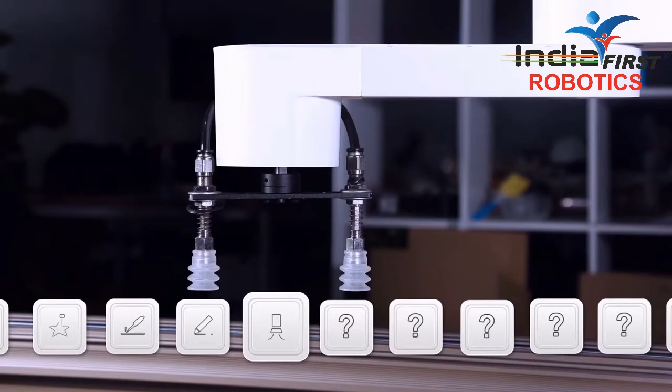DoBot M1 is an industrial-level robotic arm production platform. It's precise, fast, extendable, and also affordable. It can be your 3D printer, laser engraver, soldering machine, or whatever else you build upon it. Yes, you can build one.

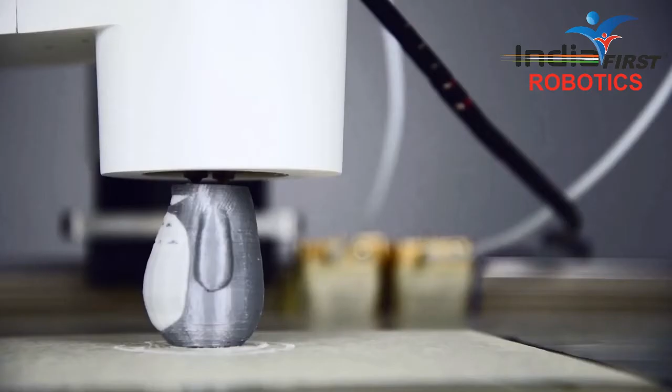DoBot M1 has 0.02 millimeters repeatability and 1.5 kilogram payload. With these standardized, easy-to-change heads, you can easily turn this power into productivity.

Like 3D printing, it can print your product with fluency and details. Two colors? No problem. Or use laser to engrave your unfading masterpiece. Or do sophisticated soldering, customizing your PCB circuit board better than a pro.

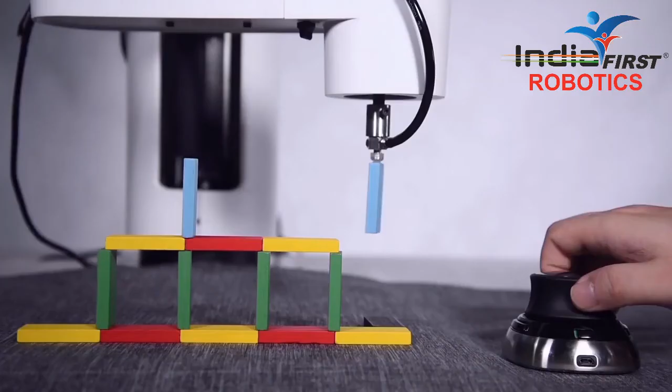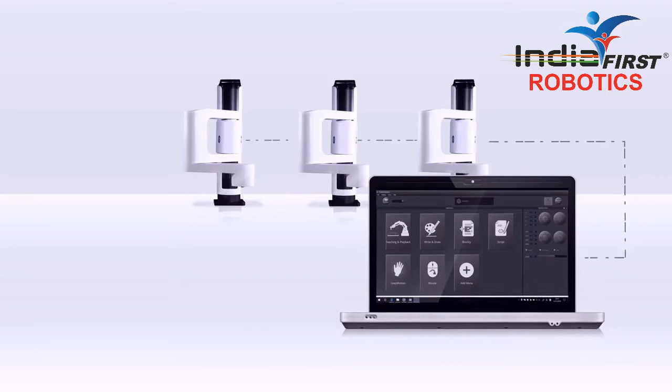Besides being multifunctional, DoBot M1 is also easy to master and develop. DoBot M1 supports Wi-Fi and Bluetooth connection. You can connect to multiple arms at once and control them via our app on PC or smartphone.

With a force-sensitive 3D mouse, you can control DoBot M1 as precisely as you want. No more trying and guessing on confusing software. With its handhold teaching feature, you can input coordinates in the fastest and most intuitive way.

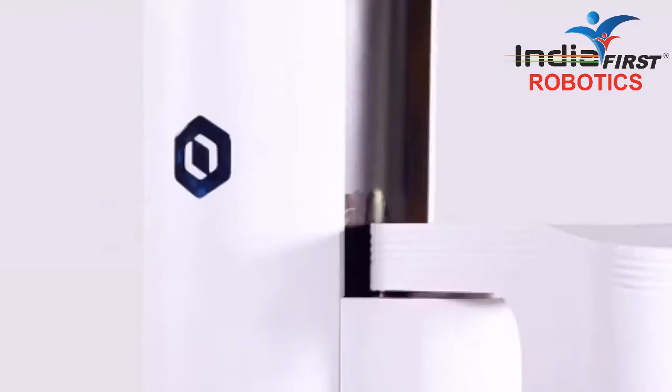DoBot M1 is programmable via the integrated APIs. You can use official or self-built developing environments, or use this visualized programming interface, making things a lot easier.

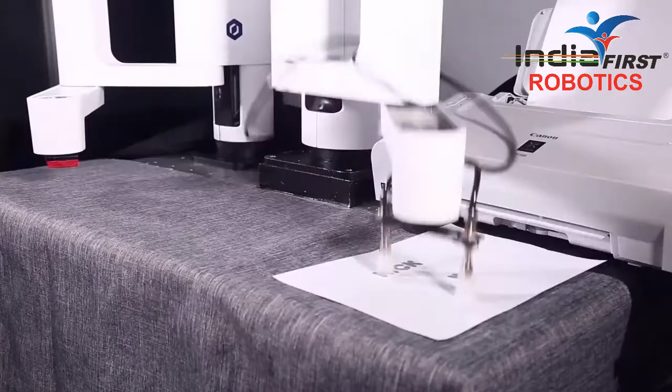But we don't stop here. DoBot M1 is highly extendable. There are no limits to your imagination on it. The maximum reach of DoBot M1 is 400 millimeters, which is enough for most situations. But why don't we think bigger, when it can actually go further?

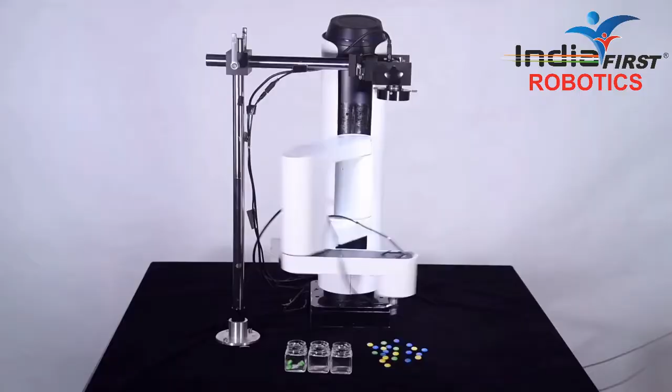Or use a camera for visual recognition. With its fast and accurate image recognizing algorithm, it can distinguish colors without making one mistake.

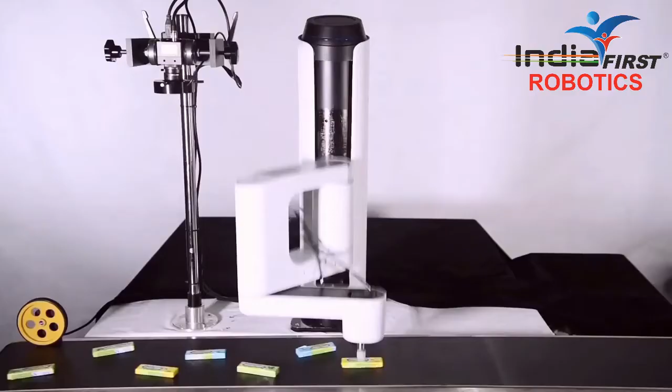DoBot M1 loves companions. They can work seamlessly together, processing paperwork way faster than humans could. Ultimately, DoBot M1 is built to replace manpower in production lines, working day and night non-stop. The built-in mapping and path planning system provides excellent mobility, offering inventory management service in your warehouse.

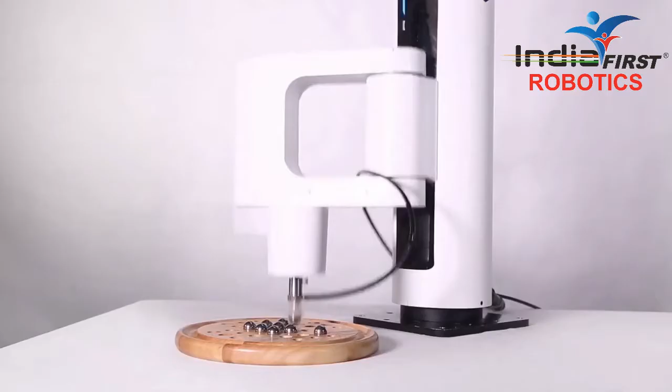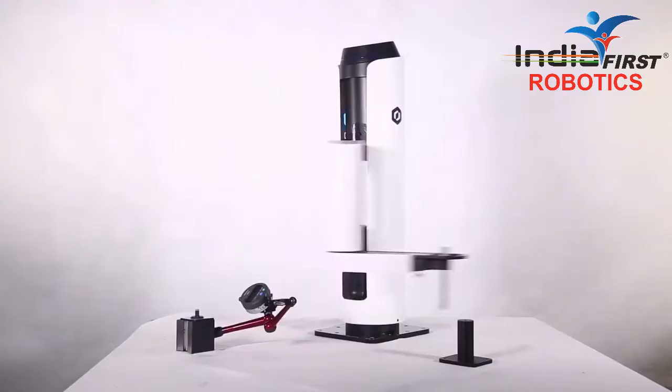To be able to create so much value, DoBot M1 has been built with extraordinary performance. The perfect calibration of the high-performance DC servo motor, harmonic reducer, and kinematic algorithm has brought out the best of both strength and speed. Repeatability of 0.02 millimeters.

Maximum payload of up to 1.5 kilograms. Angular speed of up to 200 degrees per second. It's also a steady player, never slips up.

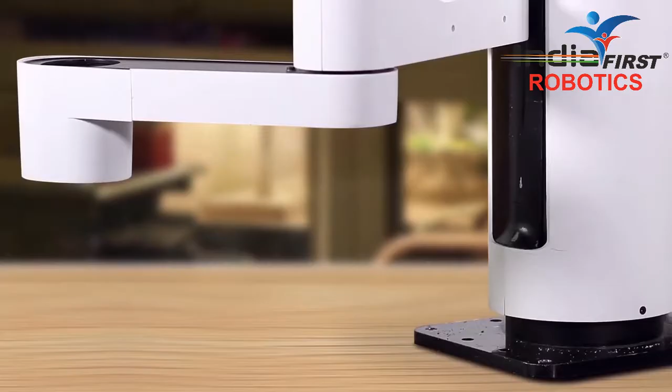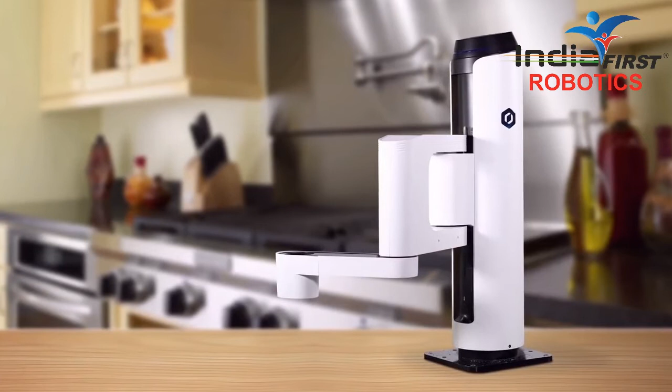Everyone loves creating things, and having a robotic arm is awesome. With DoBot M1, it's no longer a giant business's privilege to use professional robotic arms. Everyone can now benefit from cost-effective, user-friendly robotic arm technology. So when a new idea hits you, DoBot M1 will be ready. All you have to do is say yes.

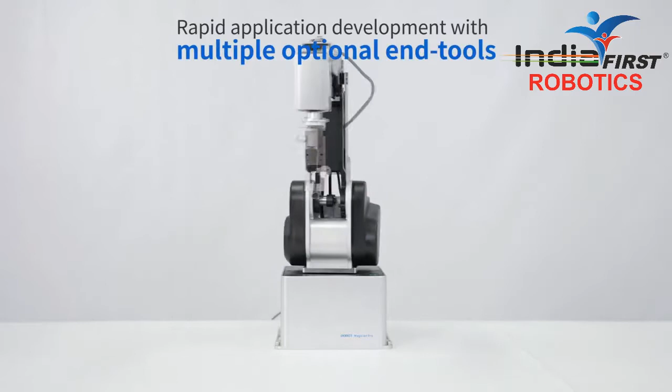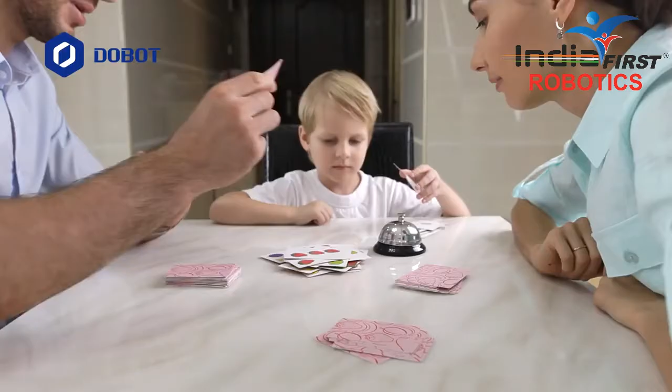Spending time with your loved ones is the best, but we also want to spend time on our hobbies. So how do we combine the two? Most hobbies require going to a specific facility or using specific equipment. But what if you could stay home with your family and do what you love? Now you can. Introducing DoBot Magician.

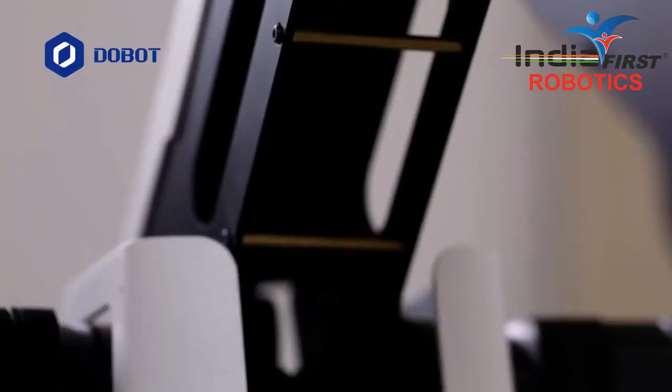The portability and multifunctionality has never been combined so well in a unibody design before. Powerfully potential in movements and enjoyable in silence. Discover a geek inside of you.

DoBot Magician can do splendid 3D printing. As a robotic arm, it's so precise that you can find plenty of details in the smoothly printed models. Get creative with the double color printing head and create original things like toys for your kids.

Say yes to the creative cook you've been hiding inside of you all this time. Shape your breakfast into whatever you like. Besides, you don't need to make a wire mess in the kitchen.

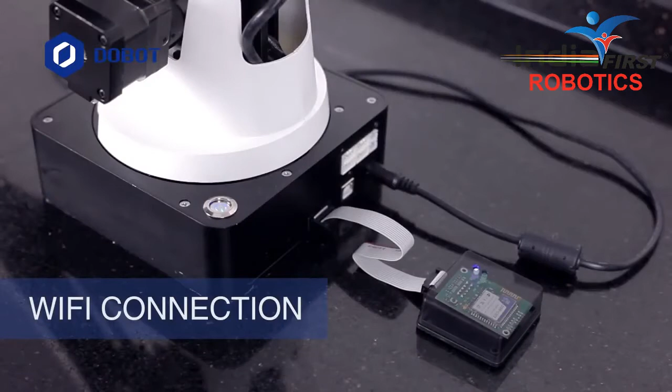Just use Wi-Fi. Unleash the possibilities with the handhold teaching feature. Teach DoBot to assist you in learning or to perform any other repetitive motion. Hold down the button and move the arm. Release, enjoy. Now the DoBot Magician software is integrated.

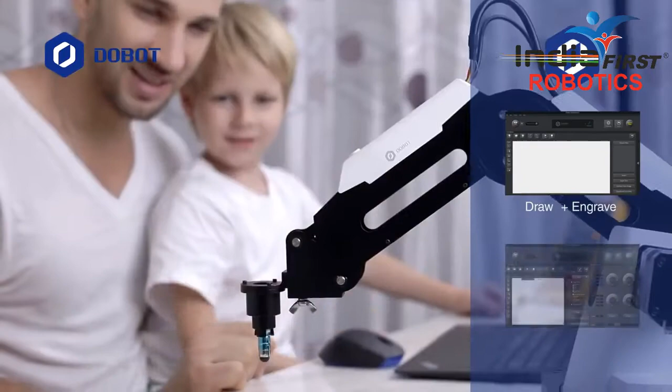DoBot Magician is your best robot to get creative with. Be twice as productive with multi-DoBot cooperation. Working without USB cables? No problem. Just pull it off and let it do its thing.

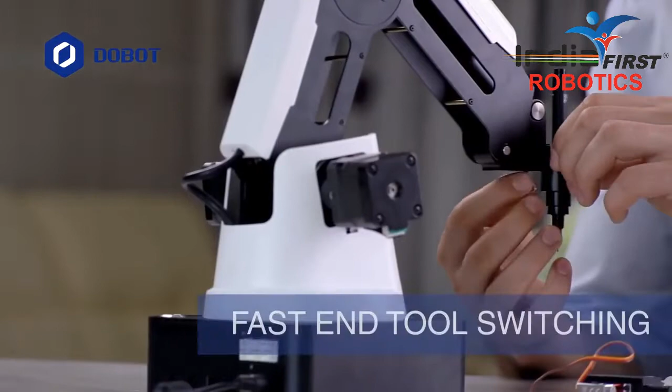Switching the end tool has never been this fast. Just unscrew the pin, change it, screw it back in. Done. DoBot Magician is also thoughtfully designed for advanced users.

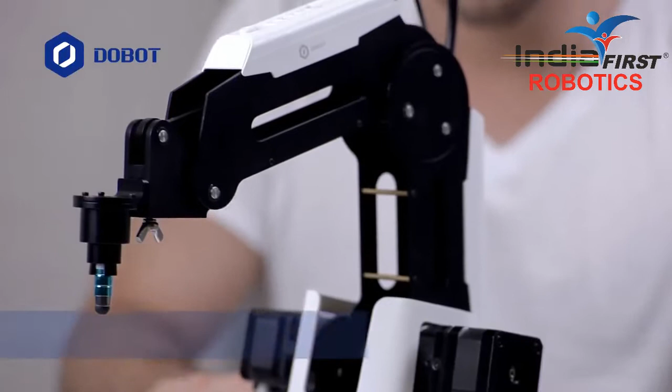There are 13 open connection ports. This is where you can really expand the horizons. You can connect additional modules like voice control, USB communication module, extra motor, or create one by yourself.

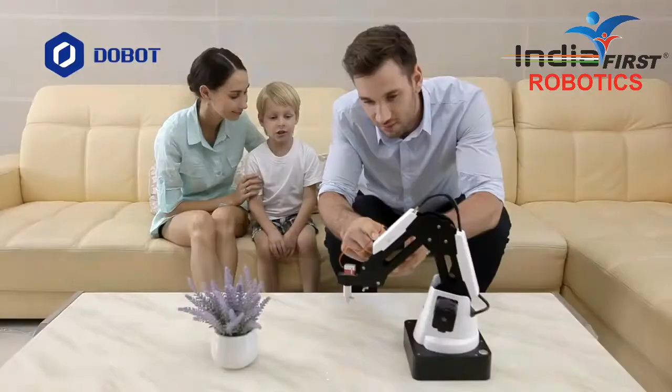You can also learn programming and robotics with DoBot Blockly. It's the best opportunity for beginners to get started in programming, no matter if you're a child or an adult. This is DoBot Magician, a robotic arm that integrates so many features to help you unleash your creativity, making you believe in what you've always wanted to. This is magic.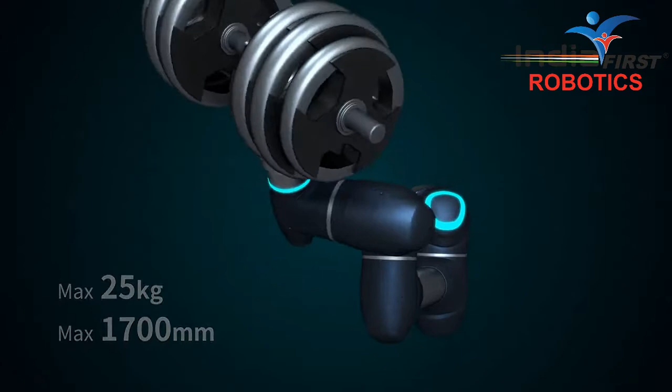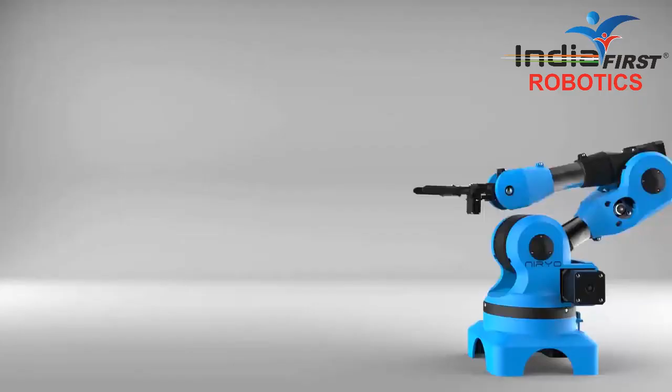Industrial robots are too expensive and hard to use. However, they could save you time at home, help you do creative work, or learn new technologies. So why keep these benefits away from you? Meet Niryo One, the first accessible 6-axis robotic arm.

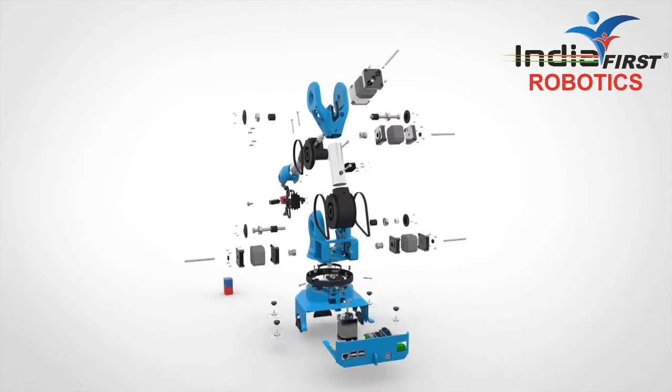Niryo One is a low-cost and user-friendly robot made out of 3D printing and open-source technologies. It was created so everyone can use it. For makers, Niryo One can help you learn robotics and be your perfect coworker.

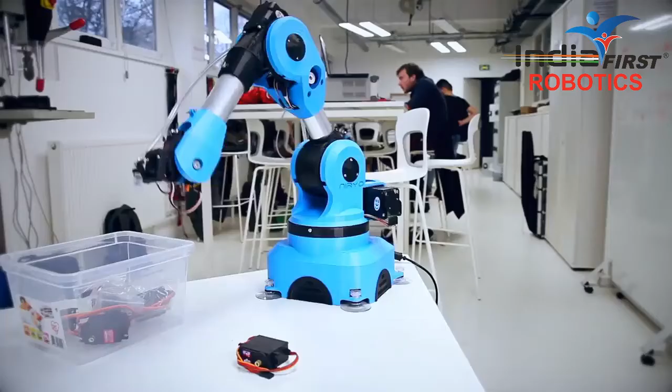It can easily pick and place many kinds of objects, for example, to automate a 3D printer. Do anything your imagination can create just by easily changing the end effector tool. With Niryo One, reproduce industrial use cases such as drilling or drawing on any surface with any orientation.

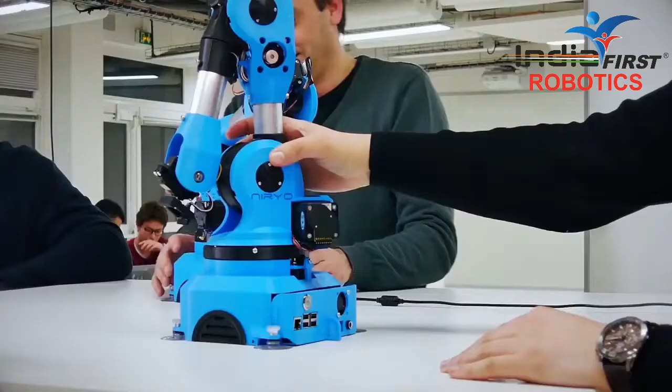Niryo One is great for robotics education, for students to learn, but also for children. They can get to know more about new technologies and get some programming basics. So much fun involved.

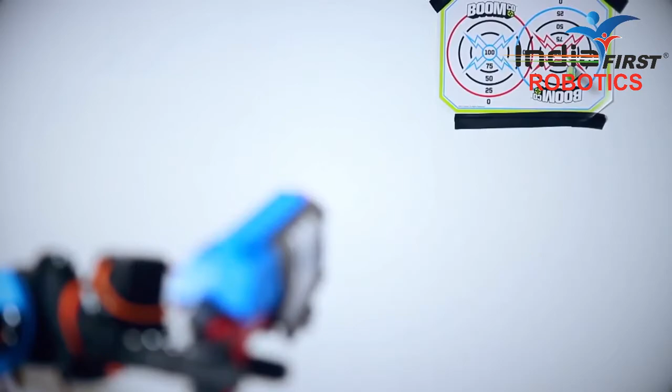Niryo One will also save you some time in daily life so you can relax and do the things that matter the most.

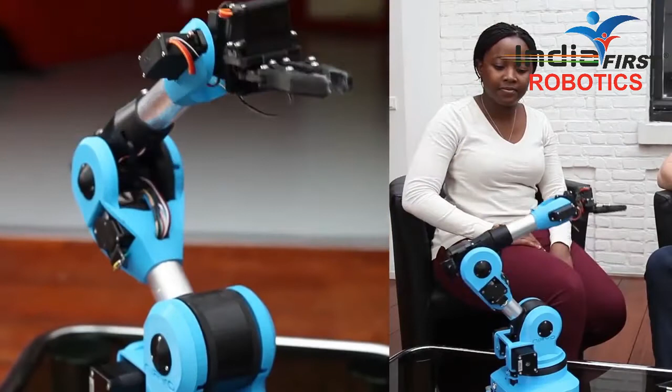Controlling Niryo One is so easy. You can teach the robot what you want it to do just by moving it with your hands. Want to use a gamepad? Here you go. You can use the mobile and web applications to have more control over the robot and control it from a remote place.

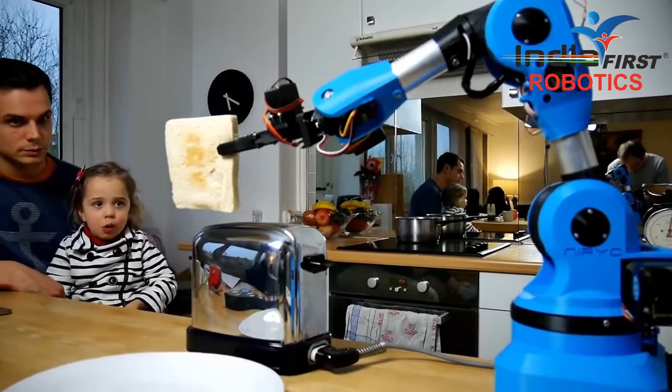Niryo One will be connected to the internet, which means you can also get free software upgrades, and you can share programs with your family, friends, and other people around the world.

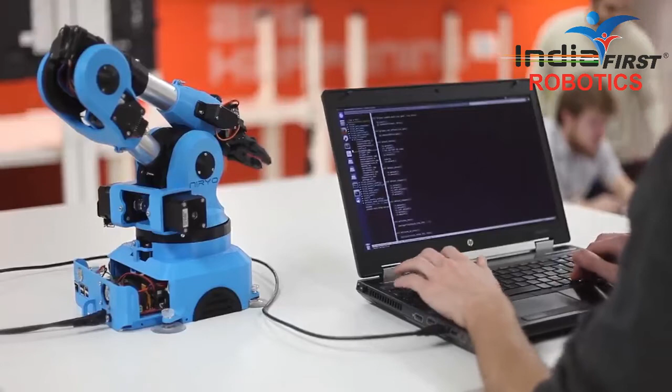We specially thought about makers and developers by making most of our code open source. STL files for 3D printing will also be released. You will be able to program directly on the robot, with many APIs and the source code. It's a great way to learn robotics and do useful stuff with Arduino, Raspberry Pi, and Robot Operating System.

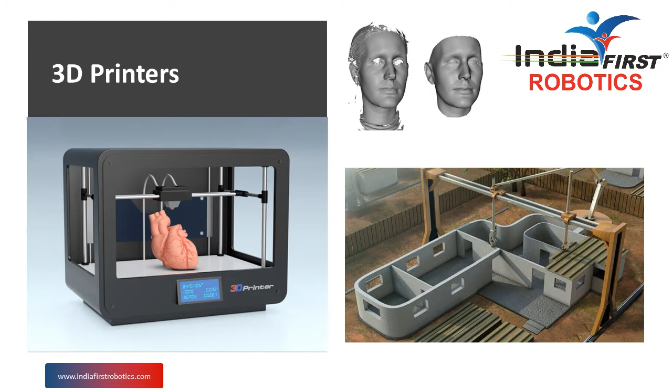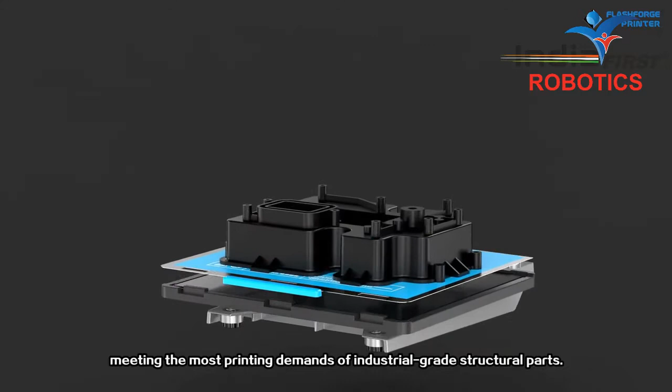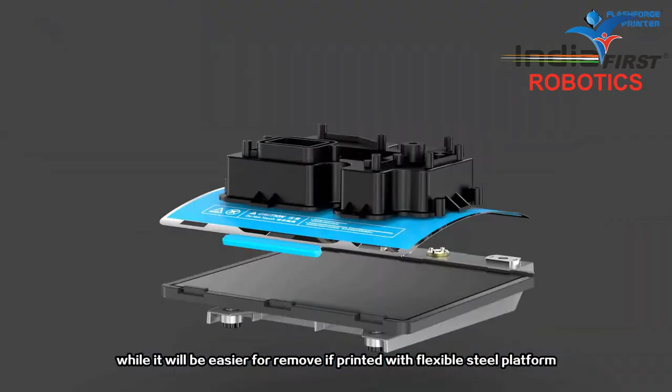Guider 2S has a large building volume and performs well in printing precision continuously for over 500 hours, meeting the most printing demands of industrial-grade structural parts. Two options of platform: the bottom can be smoother if printed with standard glass platform, while it will be easier to remove if printed with flexible steel platform.

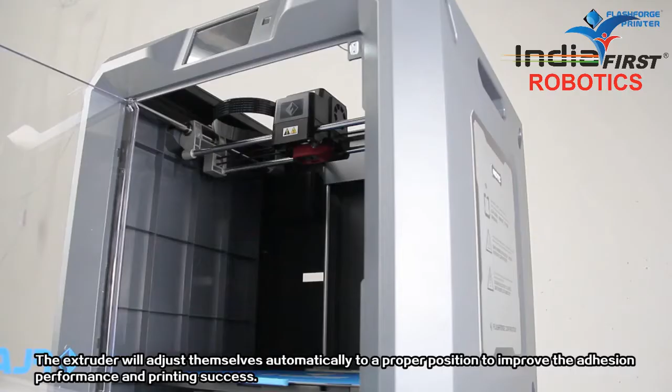Hardened steel nozzle performs better for PACF filament printing. It is more durable and has better abrasion performance. The auto-leveling function will detect the distance difference from nozzle to the platform of each point and record into the software. The extruder will adjust themselves automatically to a proper position to improve the adhesion performance and printing success.

Guider 2S is a great verifying tool for industrial designers and mechanical engineers. It makes design works from idea to real quickly with shorter production development cycle.

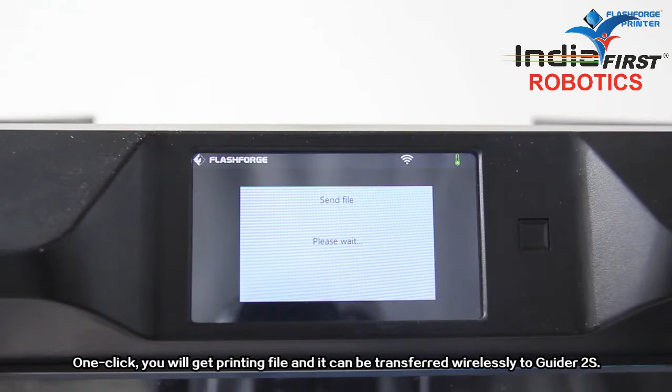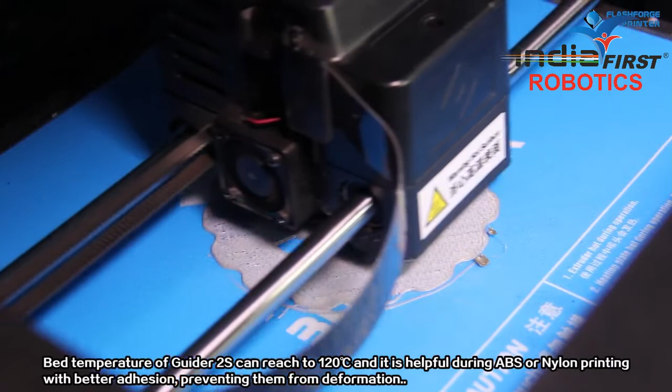FlashPrint is the professional slicing software for Guider 2S with default parameter included. One click, you will get a printing file and it can be transferred wirelessly to Guider 2S. Bed temperature of Guider 2S can reach 120 Celsius degrees, and it is helpful during ABS or nylon printing with better adhesion, preventing them from deformation.

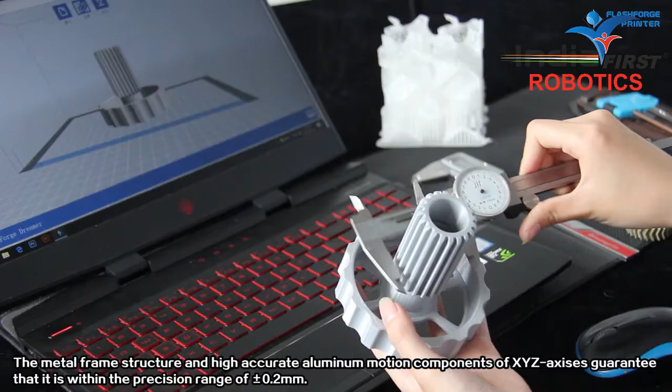Guider 2S supports instant temperature and speed adjustment during printing process. Resume printing function ensures the printing success after Guider 2S recovers from a sudden power off. The metal frame structure and high accurate aluminum motion components of XYZ axes guarantee that it is within the precision range of plus and minus 0.2 mm. Even printing tiny needle object can get good effect.

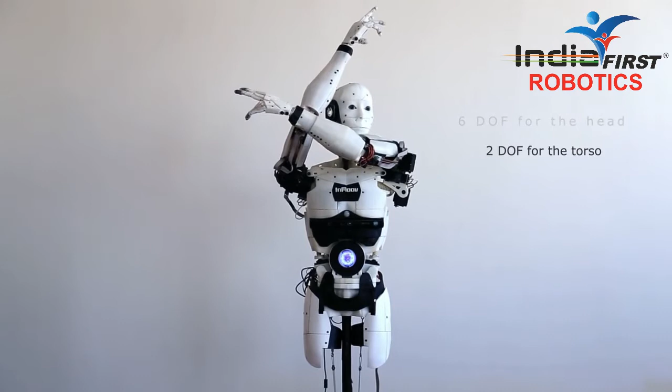I feel good. I love this.

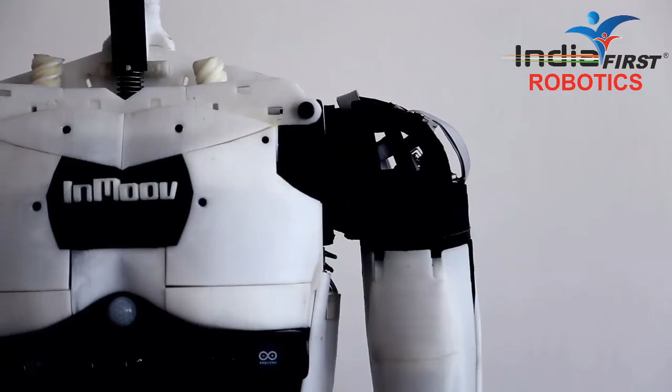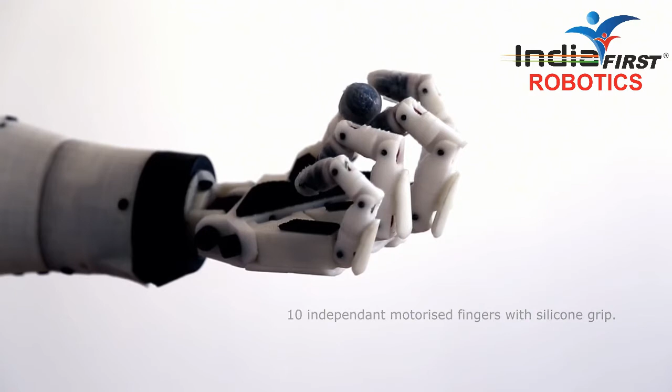Yes. Close hand. Did you say close hand? Yes. Okay. Full speed. Okay. Rest. Did you say rest? Yes. Okay. Okay. Close hand. Did you say close hand? Yes. Okay. Come closer. Okay. Close hand. Did you say close hand? Yes. Yes. Okay. Surrender. Did you say surrender? Yes. Okay. Giving. Did you say giving? Yes. Okay.